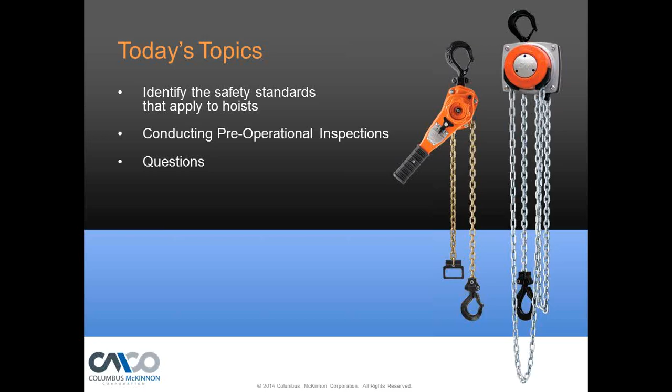So what we're going to do is identify the safety standards that apply to hoists, and conduct pre-operation inspections - what do you got to do to conduct those - and we'll save the questions for last. At any time, or if we don't have time to finish all the questions, I will contact each one of you individually and answer questions.

All right, so let's get into the safety standards that cover hoist. I like to always start off with this because where do these safety standards come from, and how do I find out more about inspection of my equipment? The number one thing is to get the owner-operator's manual for the brand of hoist that you have and the company that made that hoist. That's the start, and then you want to refer yourself to the industry standard.

So if it's an underhung hoist, it's ASME B30.16, whether that hoist is electric, air-operated, or a manual hoist. A lot of people don't realize that some of those large electric hoists fall into the same category as the small manual hoist. So whatever you do with the small manual hoist, you have to do the same thing with the large electrical or powered hoist, I should say.

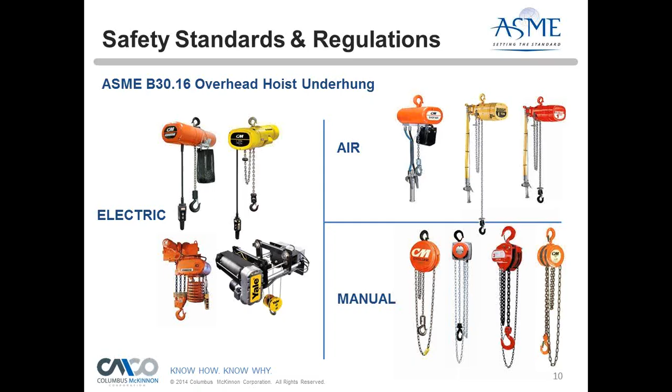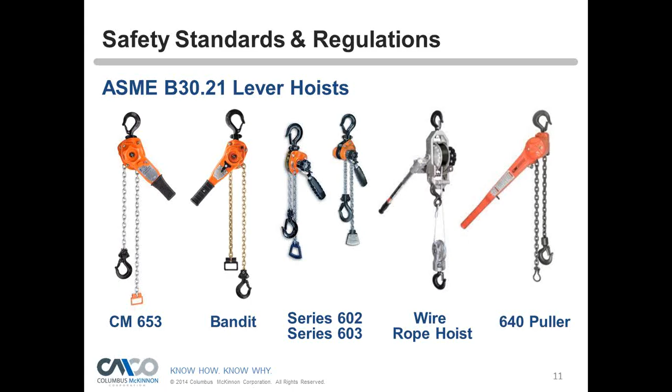For lever-operated tools, they fall under a different spec. It reads fairly close to the 16 spec - it's B30.21 for lever hoist. Whether you have a chain type, wire rope type, or sometimes a synthetic sling for the lifting instead of chain, that would all fall under B30.21. And it's important to know what standard your hoist equipment falls under.

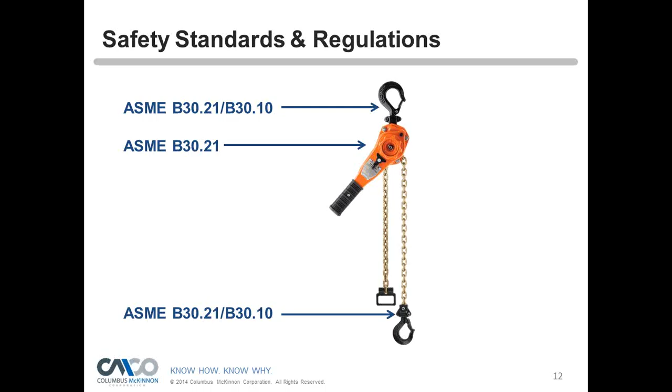It's interesting to note that when you look at a hoist, there are multiple standards that apply to it. So here, just a simple lever tool, we have B30.10 for the hook inspection and 21 for the lever hoist. So sometimes there are multiple standards for one piece of equipment, so you would need two standards to reference for the operation and inspection of that unit.

And then let's look at a fairly simple crane, which is a jib crane here, which falls under the category of a monorail or an underhung, and that falls under the category of B30.11, so the inspection of that equipment would fall under B30.11.

The hoist would still fall under 16, and then we've got B30.10 for hooks, slings under 9, 20 for below the hook lifting equipment, rigging hardware under 26. So we've got a whole library here of things that need to be looked at as far as inspection is concerned, and in reality your operator should be looking at that equipment prior to doing any lift, especially the rigging equipment.

The pre-operational inspection of the jib and the hoist only have to be done at the start of the shift, but your rigging equipment should be looked at as well.

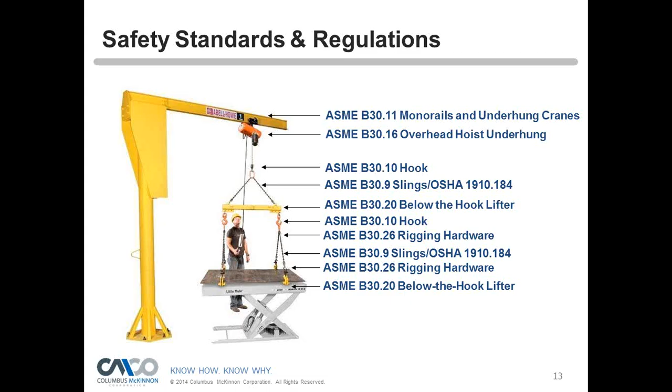So let's start the pre-operational inspection, what your operator should be doing. There's two general classes of inspection, and I just want to briefly go over those so that we don't mix up what this type of inspection is.

We have the frequent inspection, also referred to as a pre-operational inspection. Records of these don't need to be kept. You do them, you want to train your people to do them, and we highly recommend they do it at the start of every shift. They're going to be on the ground, so visually they're going to have to look at what they can see from the ground.

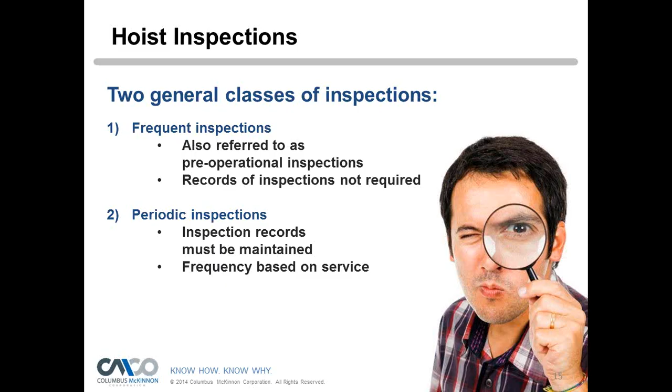How does it differ from a periodic inspection? A periodic inspection is a very detailed inspection, and records must be kept. This is where someone's going to actually look at a chain hoist link by link, or go through the entire wire rope hoist, and maybe get up on a scissor lift and look at the mounting and the torque and everything like that, and document it, cross the T's, dot the I's. That's what the periodic inspection is.

How often do you need to do periodic inspections? For normal service, if you're lifting less than 65% of rated loads and 25% of the time, you want to do an annual inspection. Heavy service, if it exceeds that normal service, at least twice a year. Severe service, you want to go quarterly. Severe service is abnormal operating conditions that you wouldn't normally see, like chemicals, heat, extreme cold, caustic environments, anything that's not normal. Then you want to look at that four times a year and do a periodic inspection and document that.

So let's continue on.

Latches are required on hoisting equipment unless it constitutes a hazard, but latches are required for the most part. Without the latch, you might think everything's okay, but the hook could be starting to stretch or it was overloaded, and the latch is a good indicator of that. It draws my attention and gives some concern, so I would want to bring that to the attention of a competent person, someone trained to inspect or maintain these.

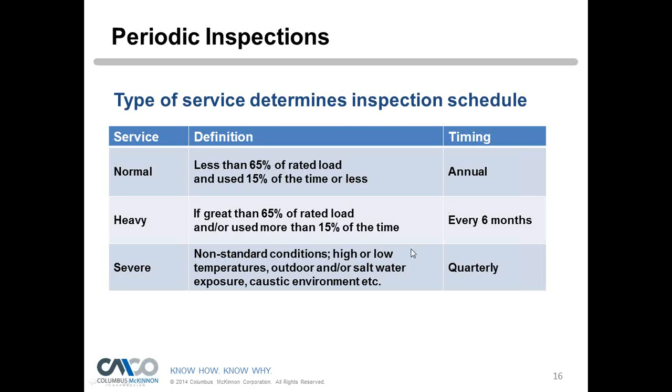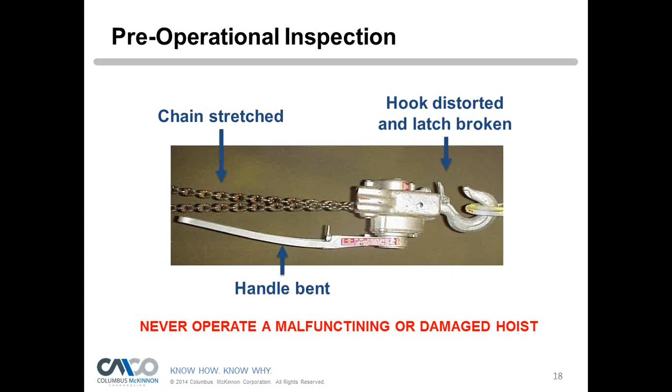Frequent inspections, no records required, and we actually supply some checklists. We have our sales guys do some safety courses, and they'll supply them. We also sell a crane operator safety kit when we supply these. The reality is you could laminate these and put them on your crane or your pendant so operators remember to do them. Something we're starting internally in CM is we're going to make all our operators do this and sign off every day. It's not required, but we just want to do better than what the safety standards say.

So the first thing you want to do is make sure the crane is not tagged out of service, looking for safety and warning labels. They all need to be on there to be compliant, and it has the do's and don'ts.

Your control devices, make sure the markings match what the functions of the crane are or the hoisting equipment. Again, the hook, we're going to look for damaged hooks of that nature. We're going to check our limit switches and be sure they're operating properly.

A limit switch is basically a shutoff switch where you don't want to travel into the bottom of a crane or a hoist, and sometimes they're often in the lowering direction as well, so we don't want to hit the floor and possibly spool out our wire rope or remove our chain from the hoist and it comes down on the operator. Not all hoists have limit switches. Some have slip clutches, which act as a limit switch. So we need to know what type of hoist we have and what are the limit switches in the hoist and how they work, and your operators need to be trained on that.

Unusual sound - maybe they hear a sound they haven't heard in the past. Hey, I never heard that sound before, so that's something I would want to bring to someone's attention. It's a weird sound, or it just doesn't sound right. That should be a red flag.

Is there oil leaking out of it? The hoist chain, as best we can, check the integrity of the chain. Kind of look around and see if there's any nicks, gouges, heat damage, things of that nature. We'll get into that a little bit deeper.

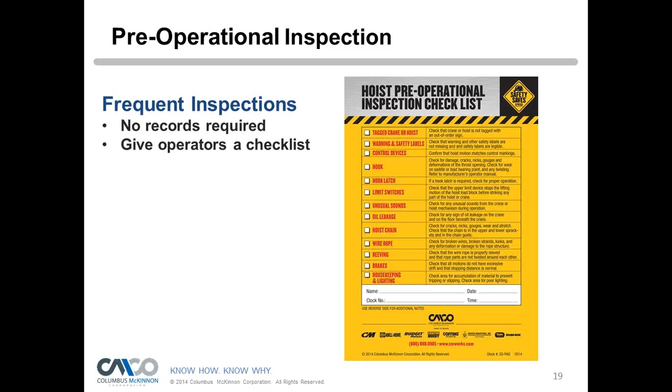Lockout tags - you never want to operate a hoist that's been tagged out of service. I know sometimes third-party inspectors will come in and they will tag things out based on what they see, but they have no authority to remove it or anything like that. They'll just tag it, and some places, to be honest with you, will remove those tags because they have work to do and they'll continue to use it.

That's a bad situation. So if there is a lockout tag or a tag that says danger, do not use it, there's a reason for that, and you want to see the appropriate person or safety personnel, maintenance crew, and ask what's going on. Usually they will know about it.

Make sure that everything has a rated load, that you understand what the rated load is, and find what the weakest link in the system is. You could have a monorail system that has a 2-ton crane and the monorail is rated for 5-ton, and then you can't lift 5-ton, right? You have to find the weakest link. Or your rigging might be weaker than the entire system - you might have an eye-bolt that's only good for 500 pounds. So that's things we need to look for.

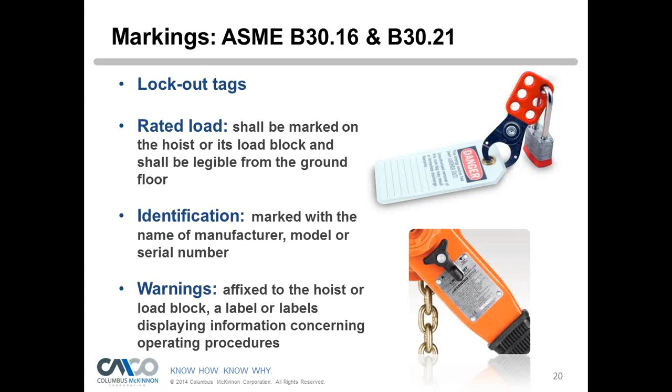Identification - you may not be able to see it from the floor, but the make, model, serial number should pretty much jump out. Even if it's not, you want to bring that to the attention of the maintenance crews. You might not be able to read a serial number from the floor, but certainly you'll be able to see the manufacturer of that unit and be aware of where the serial number tag is so that you can see that it's there. And again, all warning labels need to be on there.

Depending on how you're standing. Is it my right? Which right is it? Is it the right from the control panel?

This is not mandatory, but what I recommend people do is mark north, south, east, and west on the bottom of your hoist or somewhere on the building where they can see it. Then it's definite, not relative, so it's not about what's forward or reverse depending on how you're standing. That gets confusing, but it's common with pendants, so you may want to relabel with north, south, east, west. That's just a recommendation to eliminate confusion.

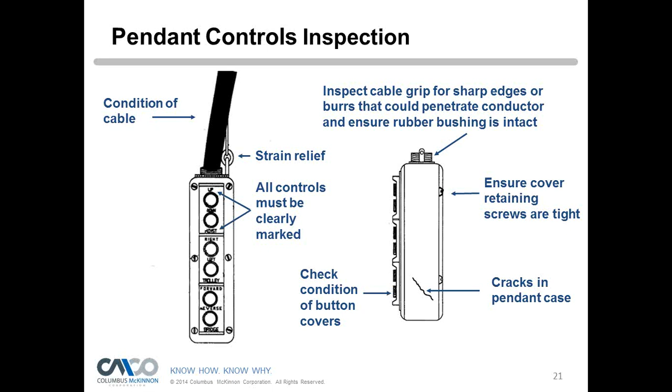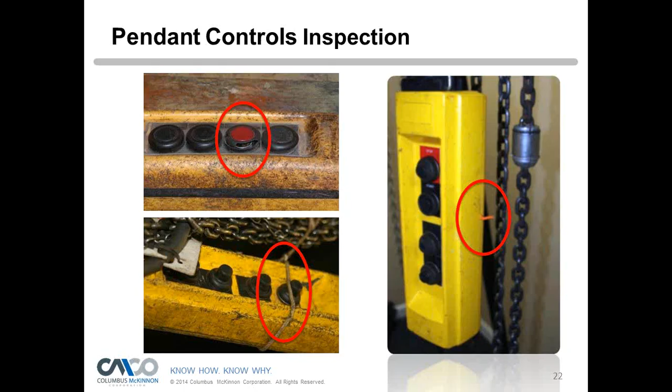In the picture to the far right, there's a wire sticking out. Why is that sticking out? That could be an electrical hazard. It may be a wire that's not used independently for whatever reason, meaning there are more functions available that weren't utilized. However, it could create electrical shock, and that's certainly something you'd want to take out of service.

Anytime you're operating, again this goes to good housekeeping. You want to be sure there's nothing beneath the crane, materials that are subject to damage, in the event of limit switch failure. The block must not be allowed to contact the trolley, drum, or sheave.

If you're doing a pre-operational check and you think it's going to hit the bottom of the hoist, check that the limit switch is working. Stop and figure out if the limit switch is malfunctioning, or if it's one of the hoists that has a slip clutch. We don't want to test a slip clutch on a pre-operational inspection every shift—that should be done periodically. So we want to find out what type of hoist you have, or it could just be that the limit switch has failed and needs to be replaced.

Excuse me, Peter? I'm sorry, I wanted to jump in with a quick polling question if you don't mind. Sure, okay, here we go.

A question for everybody: what type of inspection requires documented records that it was done? Is it frequent, periodic, operator, or rigger? Again, what type of inspection requires documented records that it was done? Frequent, periodic, operator, or rigger. For those of you on an iPad, unfortunately you won't be able to vote—you can shoot me your answer on the Q&A pane and I can add it in.

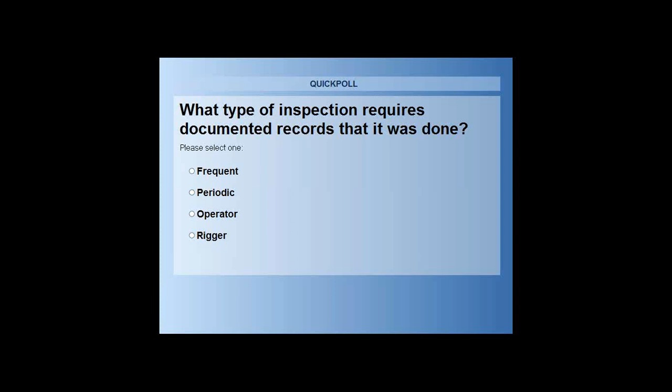It looks like right now, Peter, about 60% have voted, and it looks like 90% periodic, 5% frequent, 5% operator. Can you go ahead and share with us what the answer is? Yeah, it will be the periodic inspection that is the documented inspection—that's the full detailed inspection from top to bottom where you dot the I's, cross the T's, and you have paperwork on it, or do it through electronic means. But yeah, it's definitely the periodic. Okay, thank you.

So let's talk about operating controls. If I hit the up button, the hoist goes up, and down goes down. I hit the trolley, whether it's left or right, it responds to the exact function of what the pendant says. If it does not, that's a very dangerous situation, especially in the hoisting aspect, because we're running through the wrong circuit, so we can technically have no limits at that point.

And so therefore we can break limits, we can run the hoist chain out of the hoist, or the wire rope out of the hoist, or ram into the hoist and break the chain or wire rope, and that's a dangerous situation. We definitely don't want switches mixed up or buttons relabeled—it has to be fixed at the hoist and made sure it responds exactly the way the pendant is worded.

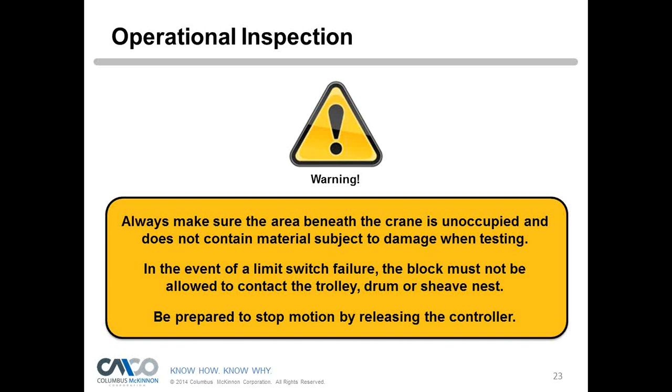Again, if there's a warning device such as a horn or a light, make sure that's working properly. If anything fails to operate, contact your maintenance and they will get the proper people in place to fix that situation. Like I said, we'll get into hooks a little bit deeper.

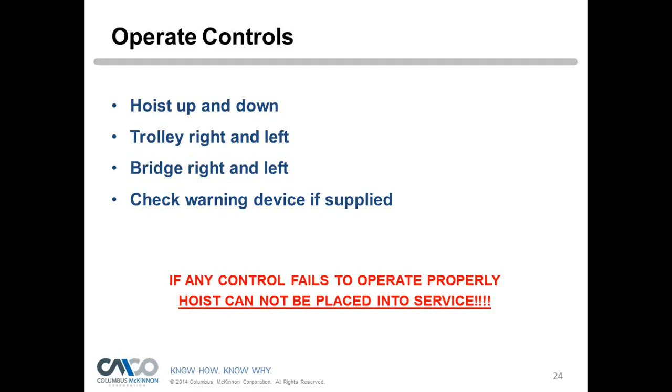It needs to be replaced, and that latch is telling us that. So that's why it's so important to have the latch. Not only is it a means to secure onto your loads, but it's also a nice visual for the operator to jump out and say, hey, something might be wrong here. And it's required on hoist.

So look for any deformation. Throat opening, 5% not to exceed 1/4 inch, or what's recommended by the manufacturer. So ASME, that's the 5% or 1/4 inch. Manufacturers always have theirs published in their books as well, so if you know that you have that manufacturer owner's manual available, look in there.

What you should be doing, if you haven't done so already, is documenting your throat openings, and you can put that usually on your owner's manual. You can document right on the owner's manual, or you can do it in your own system. So the next time you go to do your periodic inspection, it should match. And if it's starting to get larger or grow, something went wrong, and that's a telltale sign that we should get it replaced.

Any wear exceeding 10%, so if we have any wear areas, we're going to see it. Mostly we're going to see it in the saddle where everything connects, so we want to look at that as well. And then sometimes we can have nicks, gouges, things of that nature, and so those need to be looked at as well.

The severity of them depends on how severe they are and what the locations of them are. And again, your operator or crane operator is really not trained in inspection, but if they're seeing a nick or a gouge, whether it's superficial or not, if it's causing them concern, you want them to bring it up to the maintenance crew.

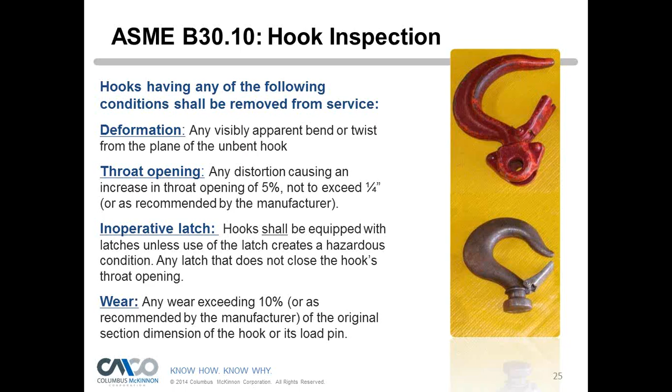So here's a hook that's been intentionally damaged, but it was not for a bad reason initially, though the practice turned out to be bad. They put X marks on the hooks so they could have a point to measure on the hook, to record it for periodic inspections. But in doing that, they put a stress riser in the hook and damaged it in the process.

Some crane hooks have dots or raised surfaces where you can measure those. Others do not, and the owner's manual will tell you where to measure. So in this case, the intentions were good, but the outcome was bad. That hook had to come out of service.

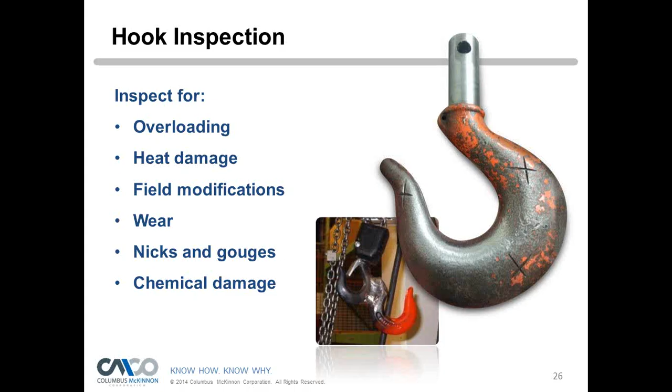Hooks should rotate freely without any load, and that's important because we do not want the chain or wire rope to twist. We want the hook to rotate so it can orient itself to the load, and if it can't, it's going to twist up your chain or wire rope, causing the hoist to jam or damaging the chain and wire rope. So those hooks should be rotating freely, and if it's not doing that easily, something's wrong.

Okay, I have another polling question to ask. This one is, what ASME standard covers manual and electric underhung hoist inspection? Is it ASME B30.9, ASME B30.10, ASME B30.16, or ASME B30.26? Which one is correct?

Oh, we're really split on this one. Go ahead and take a guess. The answers are all over the place. I'll give it another couple seconds.

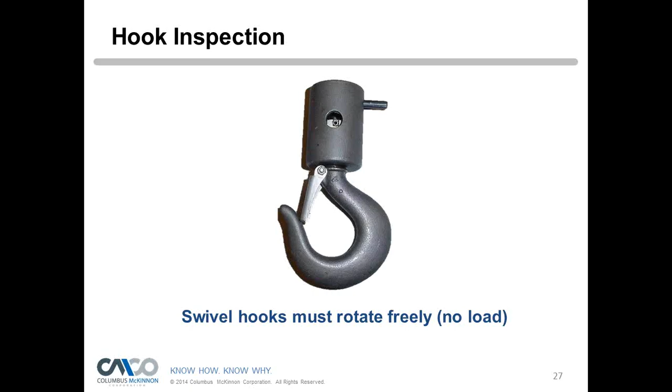All right, Peter, it looks like about 75% have voted: 4% voted for 1, 35% for 2, 56% for 3, and 6% for 4. So again, the big bulk is between B30.10 and B30.16.

It's actually B30.16 for the hoist, and in that document it'll reference B30.10, but 16 is the document for the overall hoist inspection. You would also have to get B30.10 if you wanted to learn more about hook inspection. So for those of you that answered 10, you were a little bit right, but it is definitely 16.

One thing I want to tell you, I talked about limit switches already, but I want to talk about if you have a two-speed hoist or a variable frequency drive. Obviously, you can speed up the hoist, go slow or go fast. You want to test the limit switch at the slow speed, and you want to test the limit switch at the fast speed, to be sure it's working properly for both speeds. If they fail to operate properly, you want to take that hoist out of service.

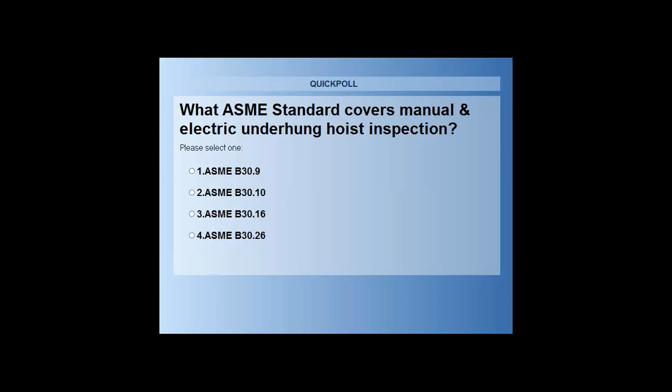Then lubrication. Does the chain seem dry to them? Hey, this seems fairly dry - that's not a good thing for a powered hoist. If that chain seems dry, they definitely want to get it lubricated, especially where the chain joins. That's where all your heat, wear, and movement are going to occur. For electric hoists, it's really critical to lubricate that chain. If operators are aware of the lubrication and checking it daily, and as soon as they realize it's getting dry they lubricate it, you're going to have chain that lasts a long time. Without doing that, you're going to be replacing a lot of chain or possibly a lot of internal components in the hoist, because if the chain is starting to wear, it's going to start damaging the hoist and draw amperage, so a lot of things can go wrong. It's going to compound - it all starts with the operator. Lubrication is the easiest thing to check, but one of the most important things to maintain.

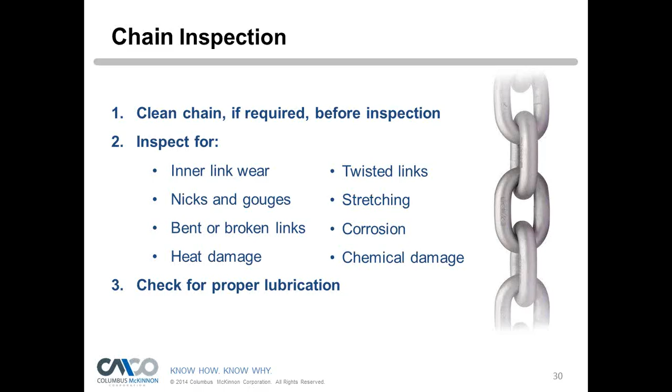So there's some visual examples - again, very extreme - but we want to show you some visual examples of what damaged chain looks like. It's that inner link wear that's going to be more common than most of these, and possibly nicks and gouges too, if they're running up near sharp corners - the hoist chain should never touch anything and should never be used to rig.

Peter, I've got a quick question. What type of chain is used in our CM electric and manual hoist? That's a good question, and I didn't bring that up in the slide there.

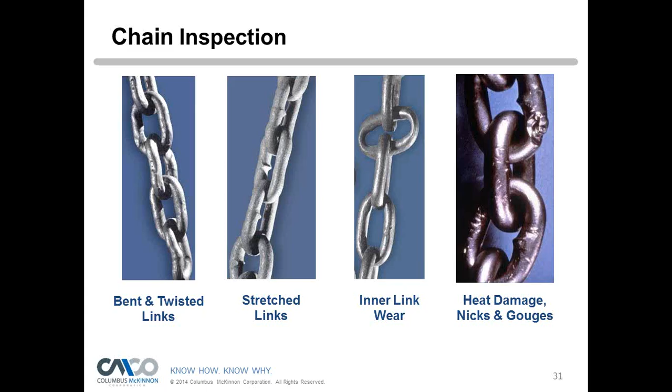Star grade chain is what we use in our powered hoist, and that's important. Star grade chain is a specially engineered chain by Columbus McKinnon. It's got a high case hardness because it runs fast speeds over a lift wheel, so it can resist wear and the heat. It definitely needs lubrication, but it's not like rigging chain. It stretches very little, maybe 3%. You don't even see it.

Rigging chains can stretch, and I think our chains stretch up to 20%. 20% is required by ASTM, but we're getting about 27% stretch in rigging chains. But hoist chain can't do that, and we don't want it to, because it has to go through lift wheels. We need it dimensionally stable. That's why we never rig with it.

Our manual hoist uses what's known as disc grade chain, a specially formulated, through hardened chain for our manual hoist. That's a good question. The hoist chain is not the same type as chains for rigging, and the hoist chain should never come in contact with loads. Okay, thank you, Peter.

Thanks for the question. Wire rope inspection: if you have a wire rope hoist, they're looking for broken wires. 12 randomly distributed wires in one rope lay is cause for removal from service, or 4 broken wires in one strand.

If you're not familiar with the term rope lay, rope lay is the distance one strand wraps around the core - it's the horizontal distance. That's a rope lay, and we're looking for broken wires. The operator may find some broken wires. Tell them, if you see any broken wires, bring it to our attention, and let the maintenance crew or people trained in inspection make the determination whether that wire rope needs to come out of service.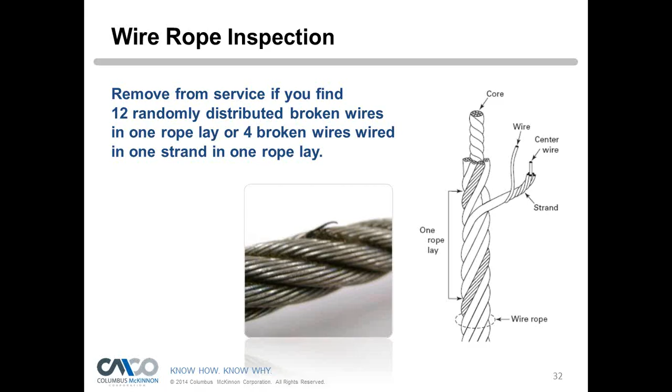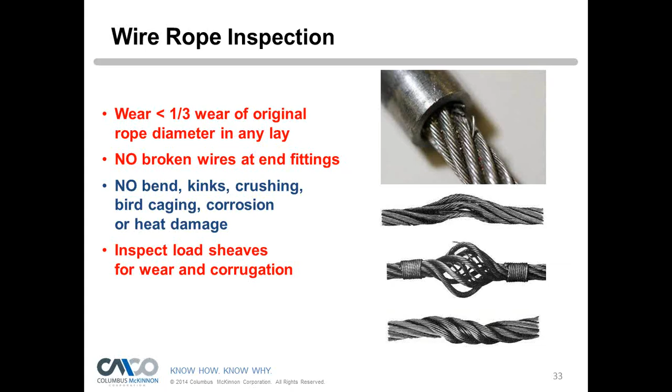Lubrication is definitely needed for wire ropes. Wire ropes articulate when they move, so without lubrication they can't articulate very well, which causes a kink, and a kink causes broken wires - the compounding effect. So again, it all starts with the operator. If the operator recognizes, hey, we're running dry here, we need to get this lubricated - you can look in the O&M manuals, and they will tell you how to properly lubricate.

Web strap hoists: wear, cuts, UV degradation. These hoists are used outdoors a lot, especially by linemen, so they're subject to sun and heat UV damage, so they can fade, and that weakens the materials. So any heat damage, distortion, no knots, excessive grease, oil, grit and dirt - because that grease and oil can attract dirt and material, and that can start breaking fibers.

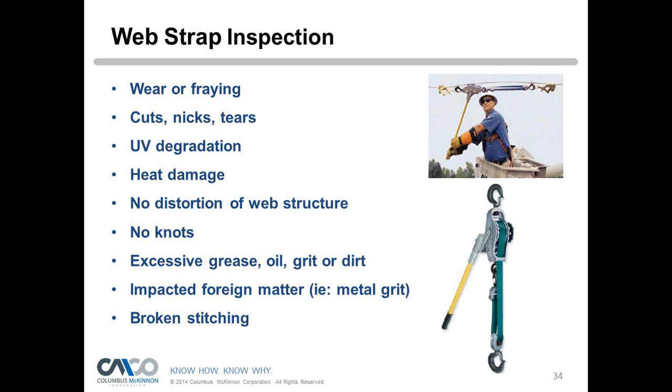More material or broken stitching - those are some of the examples I talked about. Some extreme examples, but really the biggest one is going to be cuts and tensile damage, those small cuts you see on the left-hand side at the very bottom. Small little cuts and frays are not allowed. No damage is allowed for synthetic materials, so you need to take that out of service.

Safety end stops - we want to be sure powered hoists have safety end stops, and wire rope hoists are anchored properly. For wire rope hoist, at least there should be 2 wraps on the drum in the lower position, with at least 2 wraps left on there, and if there's not, that's a problem.

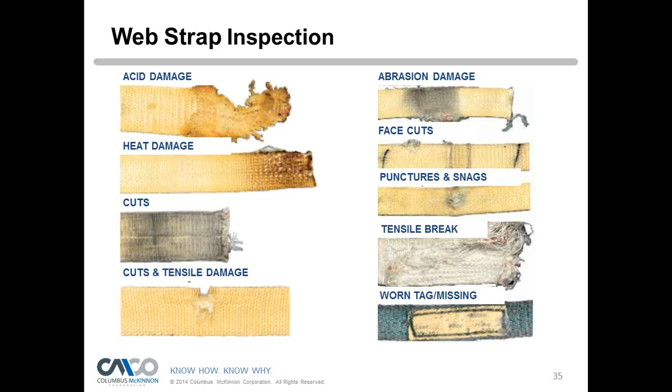For chain hoist, we want to see a safety end stop or an anchor to the hoist itself, as a last resort. So manual hoist will have end stops and anchor the hoist. Electric hoist can be anchored, or have a fairly large end stop, in the event the limit switch doesn't work - that's our last fail-safe so we don't run the chain out of the hoist. That happens more than I care to admit, where crews installing forget to put those end stops on and don't set the limit switches, and the operators aren't trained, and then one day they run the chain out of the hoist and the chain falls on them, which is not good.

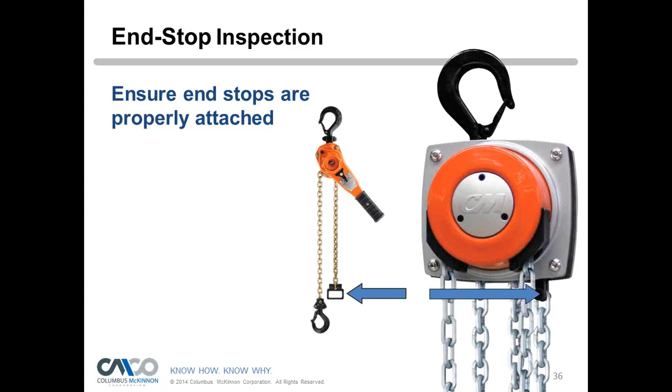If you want, operators want to check the brakes for lever hoists, 100 pounds times the number of load supporting parts of chain. So a single reeve of chain is 100 pounds, a two-part reeve is 200 pounds. Electric powered hoists are 50 pounds. Why the difference? Lever hoists need a little bit of force to close the brake, so that's why it's 100 pounds, where underhung hoists don't need that. So it's 50 pounds times the load supporting parts of chain or wire rope, and that you can find with relatively light loads in any area.

An operator can easily find that to check brake function, and it doesn't take long. You just raise it up a little bit, look at it, see if it's drifting, and if it's not, we're good to go.

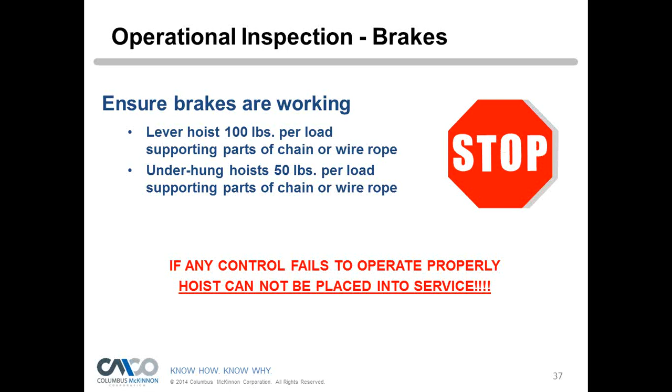And then look up, are we attached properly? So there you can see a trolley that's not attached properly. It's spaced too far out, the spacing's wrong, it's actually crooked, or it could have been overloaded and is actually bending. Definitely an operator should see that and want to take it out of service immediately.

Or you can see that someone just wrapped a chain around a piece of I-beam, which is very dangerous to do, and they just hook into it. Not very good. Instead of doing that chain, you'd want to use a beam clamp. That would be better to do.

If you don't have a beam clamp and you want to use a sling, you're going to have to get protective padding. You don't want to connect into an endless sling like that, so you'd want something with a link that you can connect into, but you'd definitely need protective padding around the sharp corners of that I-beam. Of course, you'd have to match the sling capacity to what you're lifting, and take your deratings for the type of hitch you're using.

And with synthetics, you can do the same thing, but again you'd have to protect from sharp corners, things of that nature. Operators should be aware of that, making sure that's happening. That's usually for temporary connections. If it's a permanent connection done that way, something's wrong - you should get it properly mounted.

So you think you've figured out all the sling angles, you know what you're doing, it comes naturally to you, you've been doing this for 20 years. You ever hear the 20-year guy? 'I've been doing this for 20 years, don't tell me what to do. I've operated this crane, this hoist, for 20 years,' and they don't want to hear it. They know everything, and nothing can go wrong, right? To me, it's the 20-year people that become the most dangerous. They get too complacent, just like driving - we get complacent after driving for a long time. So our guard is down, and even the most experienced person can get hurt.

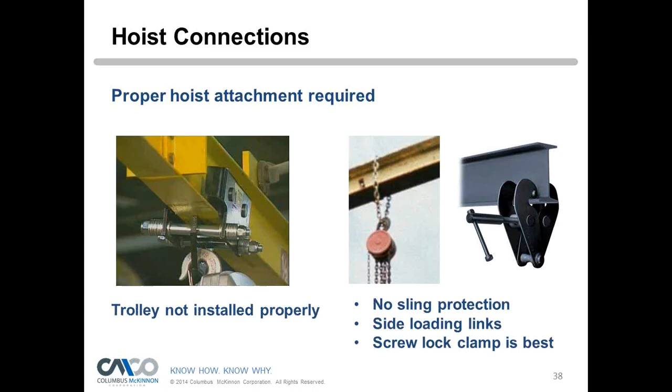My only concern with that is, obviously, the power supply. No, I don't have a problem with that. That's a good practice, and they're certifying that everything's working properly and weeding out anything that's damaged. So that's good.

There's nothing wrong with that. Again, another set of eyes is good. This doesn't have to be documented, but they should still be trained to look at stuff, so that if they do see something abnormal, maybe somebody missed it. People are human, and someone could miss something. So I recommend they do their best. I know that's a lot of hoists to check, and especially in entertainment, the show has to go on. But again, they still have to take them out of the boxes, they still have to rig them, and they can still look, right? Someone can still take a look quickly because they have to touch the hoist physically, so they can still see what they can see. That's a good practice to me, and I don't have any problems with that.

Of course, you've got to have experienced people rigging them up and make sure they're rigging them properly.

Okay, thank you, Peter, and thank you, Benjamin.

Next comes from Lauren. Is there a way we can get the hoist pre-op inspection checklist as a reference for our technicians? Is that something we could share via PDF file, Peter? Yeah, absolutely, absolutely.

That's nothing proprietary, no, it's not priority. Nothing proprietary, so we certainly could share that. Okay, proprietary, yeah, perfect, that's what I'm trying to say, I can't, yeah, the word wouldn't come out. Don't worry, you've had a lot of words, so don't worry.